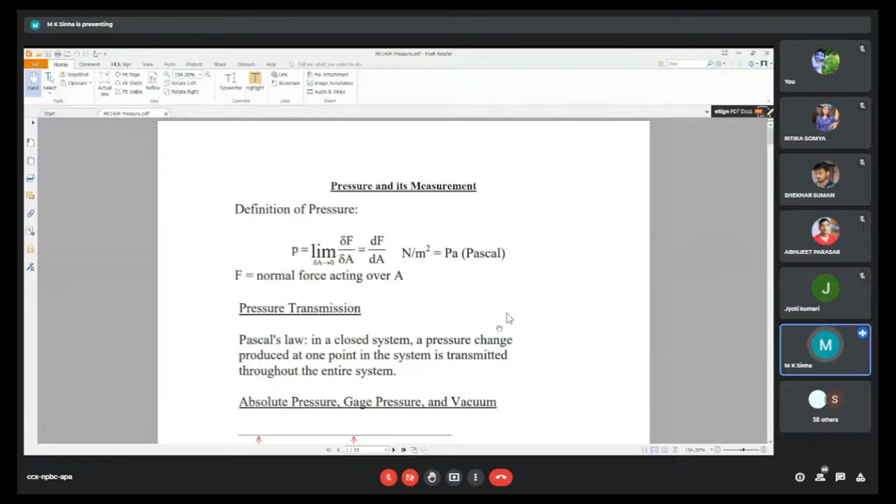It always acts inwards, as a normal force — this is called pressure transmission.

So Pascal's law applies in a closed system. There are types of systems you might have read about in thermodynamics — one is the closed system, another is the open system. Here we are discussing the closed system.

A pressure change produced at one point in the system is transmitted throughout the entire system, whatever the system — circular, cylindrical, spherical, or rectangular.

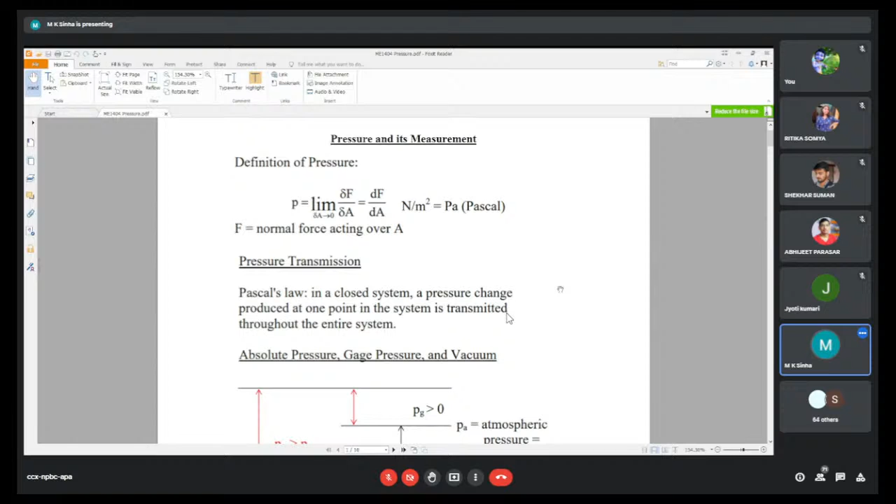It doesn't matter; the pressure change will transmit throughout the entire system we have taken or assumed. Then sometimes we talk about pressures as vacuum or higher pressure.

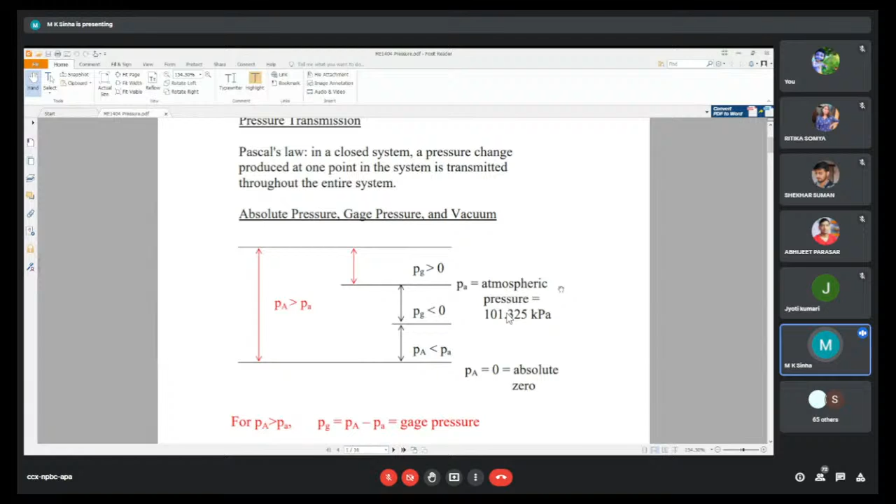So when we talk about absolute atmospheric pressure, you might know it is exactly 101.325 kilopascal.

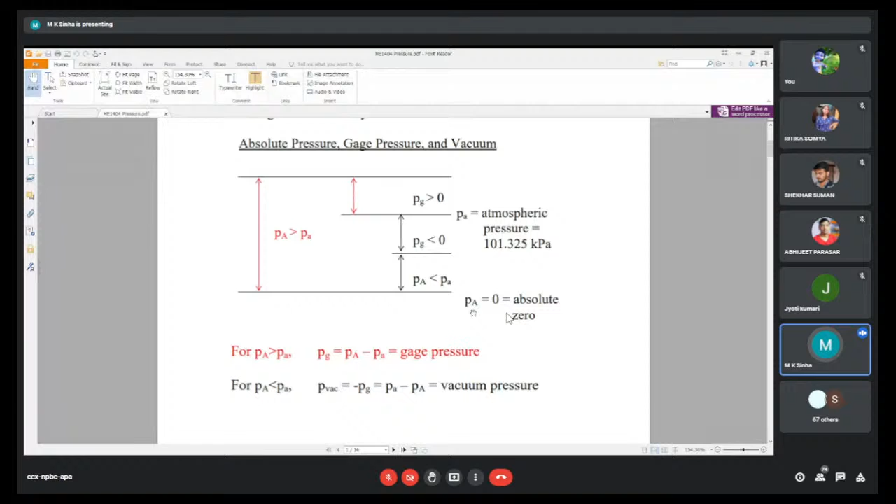We consider that when pressure at any point is greater than atmospheric pressure, the gauge pressure difference is positive. If it is less, then we are talking about vacuum pressure.

Let us generalize the pressure considering a wedge shape. In this generalized case we have chosen a wedge shape so that we can apply it to any shape.

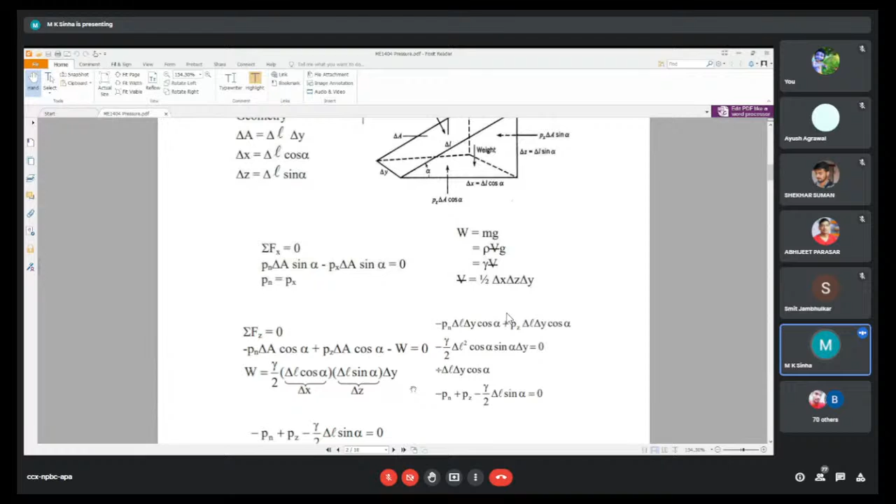Then the next component, fz, the vertical direction: minus Pn del l del y cos alpha plus Pz del l del y cos alpha equals this, where W acts downward and Pn acts downward. That's why minus Pz acts upward, and this will give relations that come out finally: Pn equals Px equals Py and Pz.

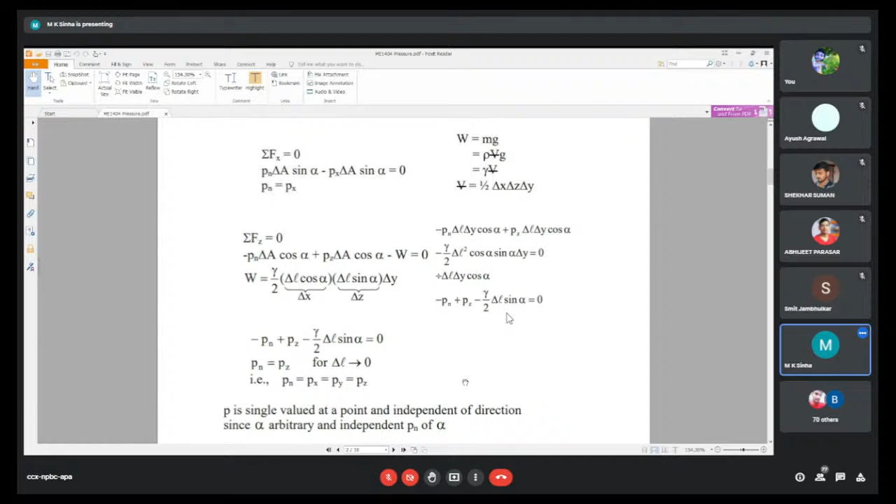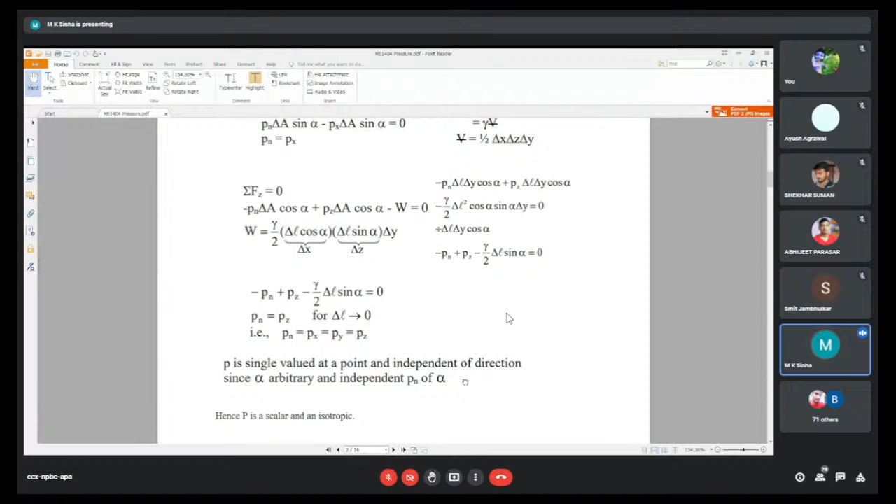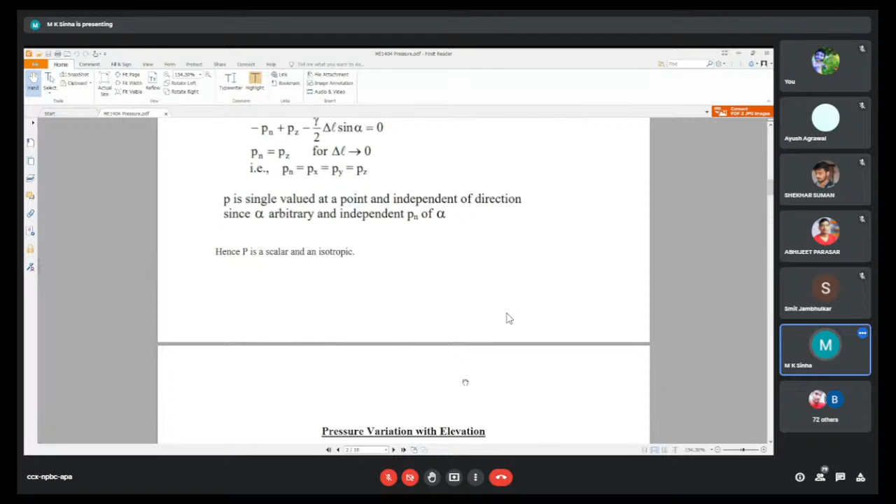So this is the basic differential equation for pressure variation with elevation. Here we consider a fluid element of length dx, dy and dz, shown along the x, y and z axes, with forces acting on it shown by arrow marks.

Remember, the bottom surface is our starting point for the z-axis, and the top section is at height dz. The lower pressure acts on the lower face, whose area is dx dy, with pressure p, and the pressure force on the bottom surface is p times the area dx dy.

On the top, the pressure also acts toward the fluid element, meaning the lower force acts upward while the upper force acts downward. Due to the element length dz, the upper pressure changes, and this is written using the Taylor series: p plus del p del z into dz, into area.

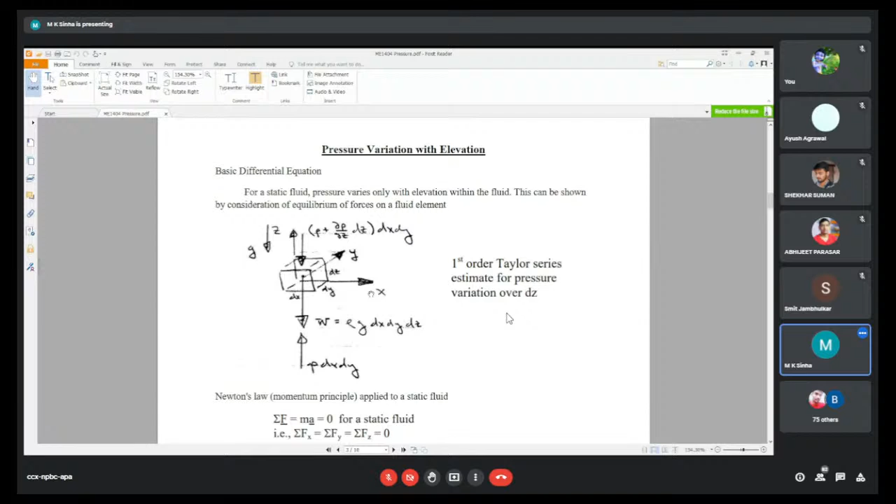This acts downward on the fluid element, and gravity also acts on this fluid element downward. So W is rho into g, meaning mg, and mg becomes rho into dx dy dz into g. All these are shown on our free body diagram.

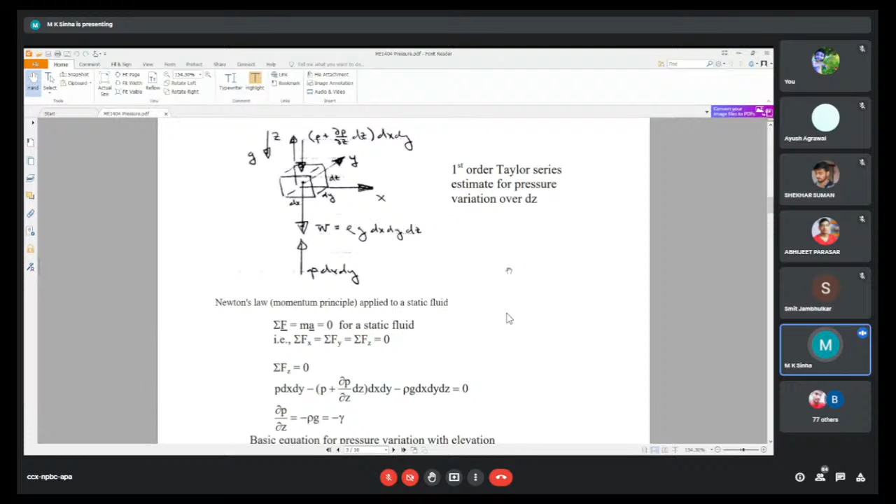This is written for hydrostatic situations, analyzing a stationary fluid element with no movement of the system. So, summation of forces equals mass into acceleration by Newton's second law. For a static case, summation of forces along x-axis, y-axis and z-axis equals 0, because in all directions it is static with no movement.

Here the z direction is upward, so p into dx dy acts from the bottom, and from the top minus p plus del p del z into dz. Remember this term is written from the Taylor series due to the change in height dz, which is why it's divided and multiplied by the area.

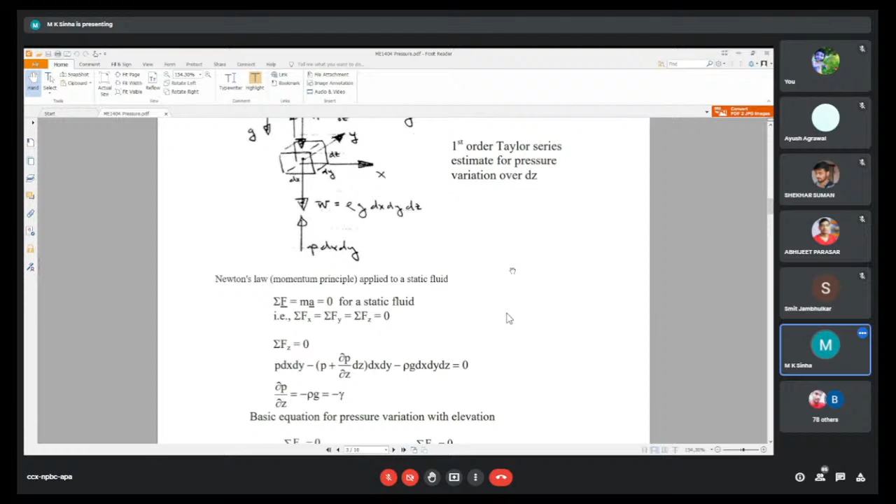We take upward forces as fz equal to 0. Downward is gravity, so minus rho g dx dy dz equals 0, or we can say del p del z equals minus rho g, or in terms of specific weight, minus gamma del p del z.

If z is the upward vertical axis, and if instead y is used, then it becomes del p del y equals minus rho g or minus gamma. Some books use y, some use z, but it is always the vertical direction. So del p del z equals minus rho g.

So here, z is the vertical direction or height. This is the elevation.

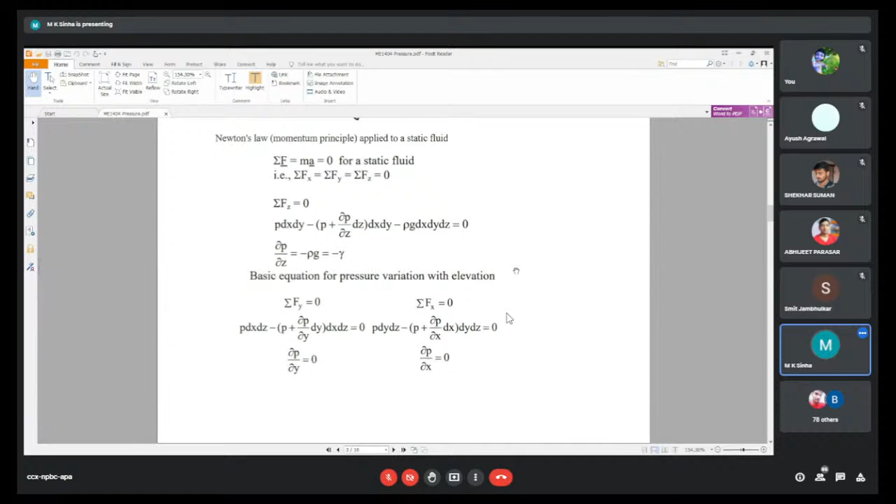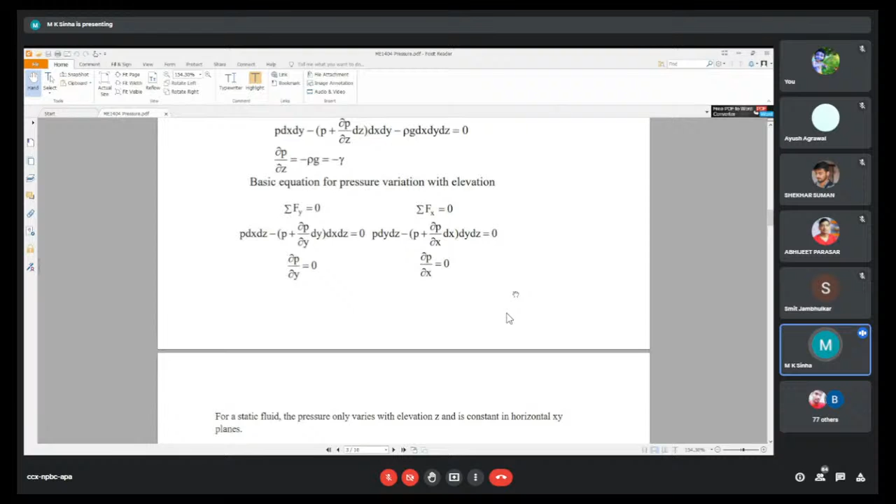This is the relation between pressure and elevation, the basic equation for pressure variation with elevation. Considering del y, del, the summation of force in y direction and x direction comes to nothing, so all these gradients come out as zero. Finally, for elevation or vertical direction only, the relation del P by del Z equals minus rho g holds.

This pressure gradient is developed due to gravity and depends on the density of the fluid. High density gives a high gradient, low density gives a low gradient.

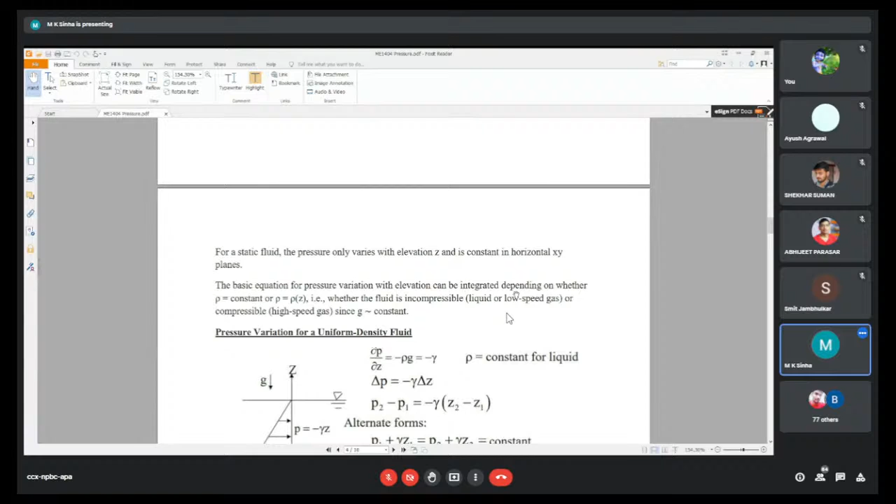So for a static fluid, the pressure only varies with elevation Z, meaning vertical height, and is constant in the horizontal xy plane. So the basic equation for pressure variation with elevation can be integrated, and rho, let us suppose, is constant. Whether the fluid is incompressible or compressible, then g is also constant. That gives us the pressure variation for uniform density.

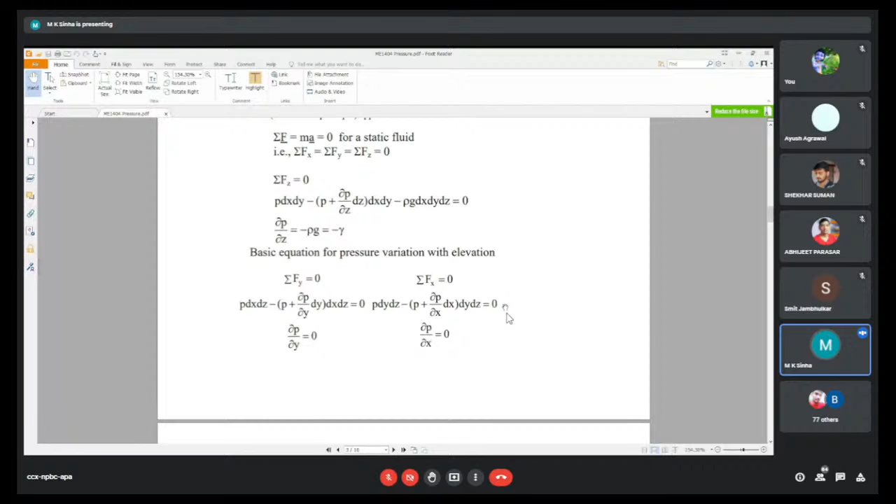When we are interested to find the pressure, we can integrate P equal to minus gamma, or minus rho g, into dz. Height variation or height may be given, so then we can find out the pressure at any height, any depth.

So let us see, that is the pressure variation throughout the uniform density of the fluid. Here the distribution of pressure is shown as pressure is a function of Z. Pressure is a function of the elevation, pressure is a function of the height.

So obviously, the distribution given at the surface is acting less, and at the bottom it acts more, due to the fluid height. As we go deeper inside, pressure acts more and more because more layers of fluid are available.

So del P by del Z equals minus gamma, or del P equals minus gamma del Z. Then the pressure difference at the final point to the initial point is equal to minus rho g times final height minus initial, or you take plus, then it becomes reverse, initial to final.

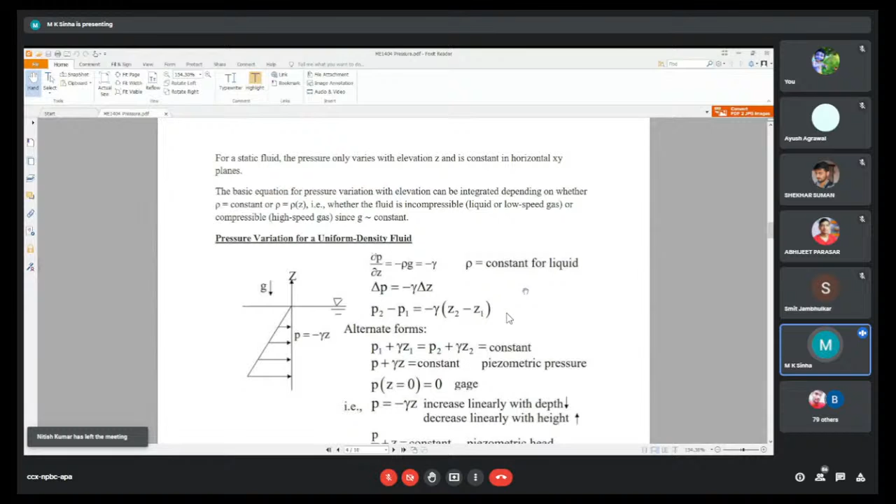But always remember, del P by del Z, del P by del Z equals minus rho g. Or you may apply P1 plus gamma Z1 equals P2 plus gamma Z2, which is constant. Or this P plus rho g Z, rho g H, if gamma Z is the actual height, yes, this is constant.

Pressure plus rho g H, pressure is nothing, rho g H, always the summation of both, that is the actual pressure plus piezometric height or the column height. That is P plus gamma Z, called the piezometric pressure. Always this is the summation of both.

P plus gamma Z, means Z is the height of the fluid plus how much pressure is acting, that will give the piezometric pressure.

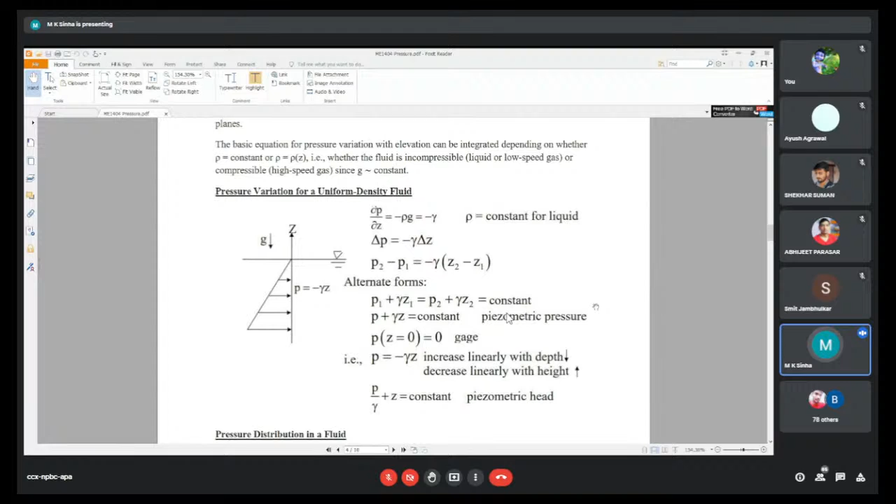When you write it in head form, P is divided by rho g, then it comes in the head form. It is also sometimes called piezometric head. Here, P by gamma plus Z is constant, this is called piezometric head. So when we use a barometer or manometer, we generally use piezometric head.

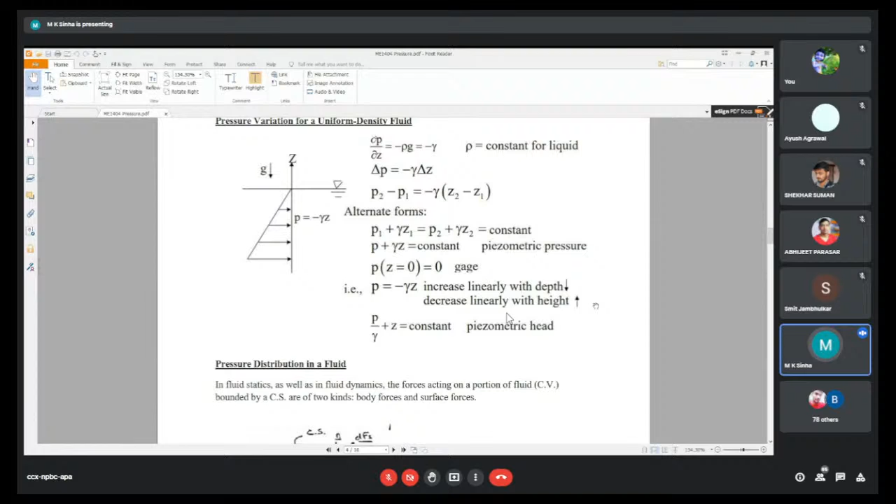But in pressure, we can also transform. So pressure may be written in absolute pressure or in head form, meter of water, meter of mercury, like that, or Pascal. So these are the relations.

Next, that is the piezometric height. Then, coming to the pressure distribution in a fluid, an arbitrary fluid is chosen here, and this portion of the control volume fluid element is taken. The control volume is formed by control surfaces, such as a square, rectangle, or cubic or cuboid shape.

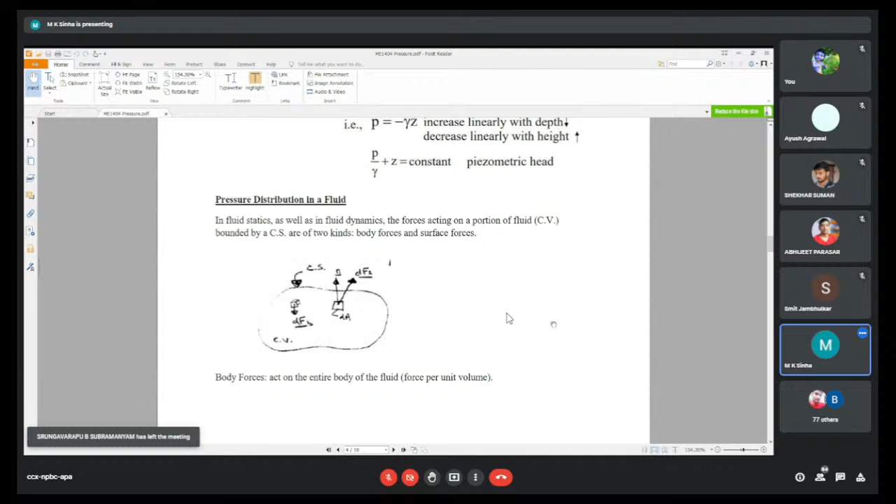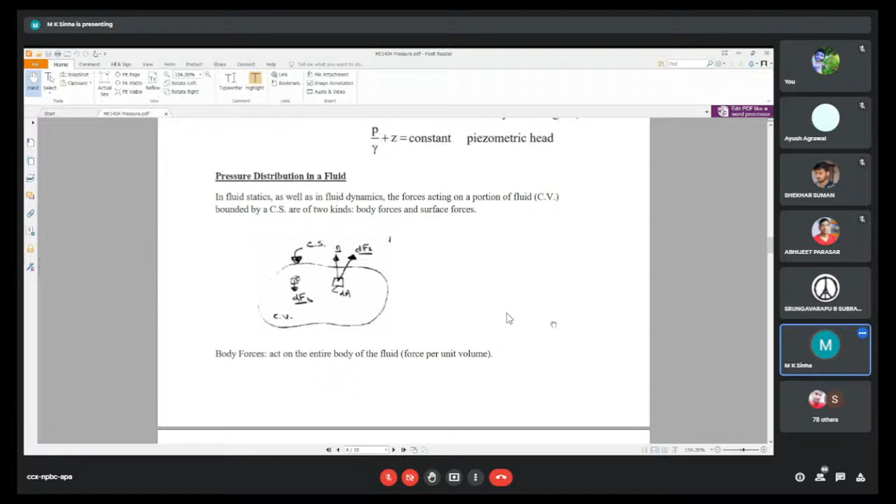Then each surface is called a control surface, and the whole system is called control volume. So the forces act on a small fluid element of area, with a unit vector outward normal, that is n, and any arbitrary force is acting, but n is the unit vector outward.

So the body force acts on the entire body of the fluid, and surface force acts at the control surface, due to the surrounding medium, as force per unit area or stress. Body force acting on the entire body means M into G, that is force per unit volume. We transfer mass into density into volume, then density per unit volume gives rho into G, that is the body force for any system.

But surface forces are different, tangential, normal, all these. Surface forces act at the control surface and are due to the surrounding medium, or force per unit area, that is the stress. Force per unit area is also pressure.

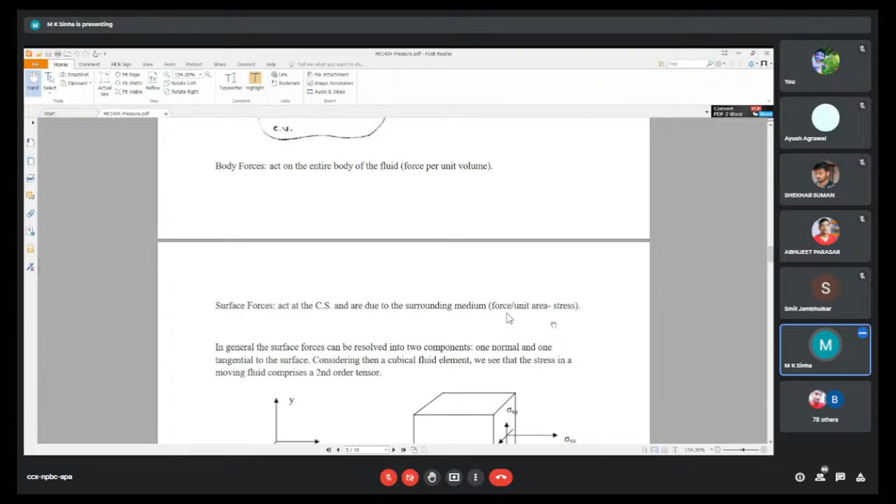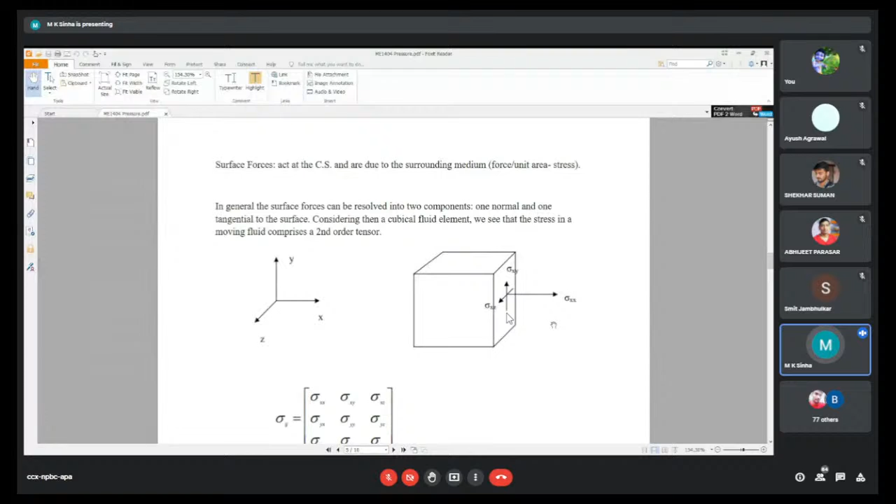So normal force acting is both pressure and stress, and shear stress acting on a plane is only a shear force. Generally here, a fluid element of dx, dy, dz is shown as its length, with x, y, z coordinate system for this cubical fluid element.

So sigma xx, sigma xy, sigma xz. Stresses acting along the axis x, and normal to the x-axis, that becomes sigma xx. Normal to the y, sigma xy. Normal to the z, sigma xz.

The stress acts along the x-axis as the first subscript, then acts perpendicular to the x-axis as the second subscript - perpendicular to y gives sigma xy, perpendicular to z gives sigma xz, acting along x. That creates the stresses. So when we write sigma as a matrix, it is sigma xx, sigma xy, sigma xz.

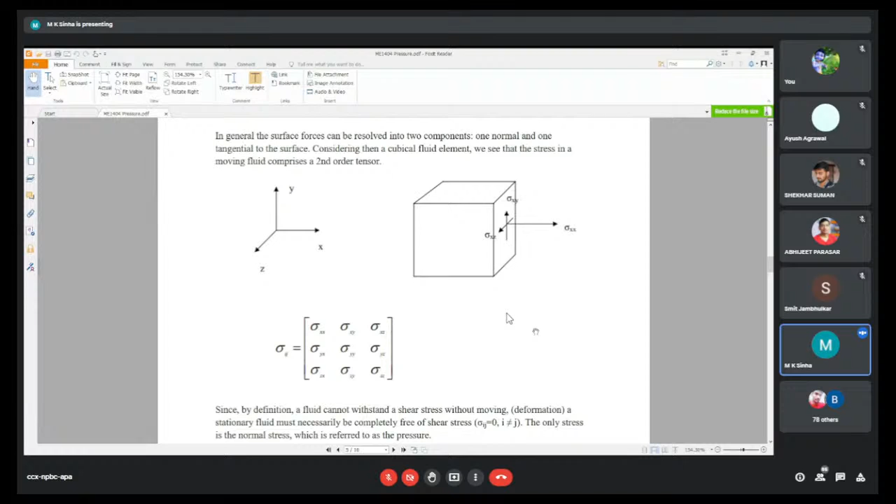So fluid cannot withstand shear stress. The fluid cannot withstand a shear stress without moving or deforming. So a stationary fluid must necessarily be completely free of shear stress. Please try to understand - the fluid cannot withstand shear stress without moving. So a stationary fluid must necessarily be completely free of shear stresses sigma ij or sigma xy, sigma xz.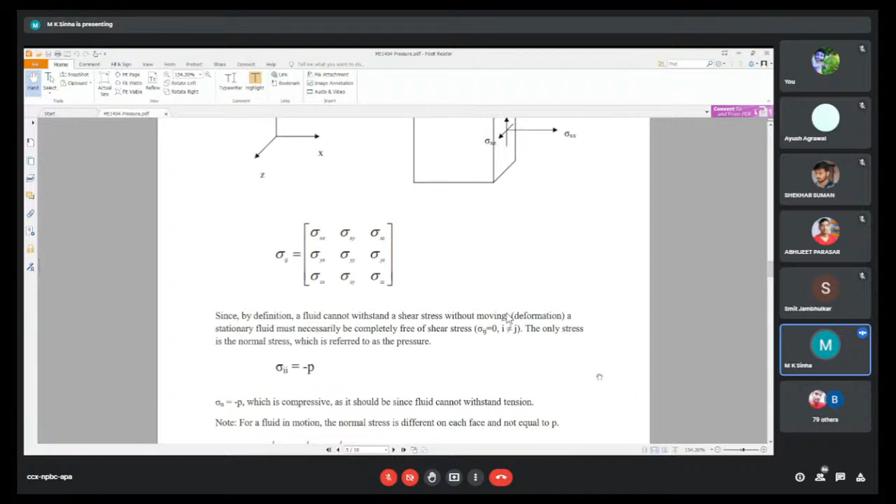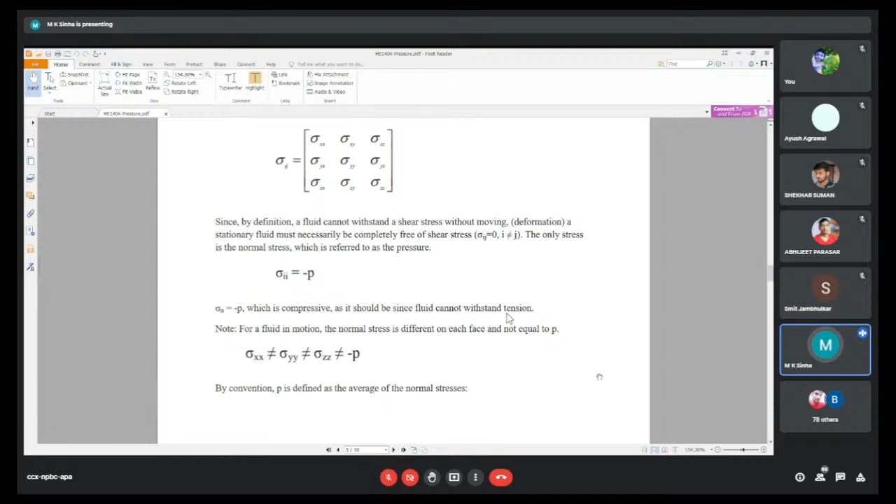So fluid cannot withstand tension. Note that for fluid in motion, the normal stress is different on each face and not equal to P. When it is in motion - here we are talking about the stationary case, that's why this is the analysis of hydrostatic pressure. When we go to the kinematics chapter, we will again discuss these things - sigma, p, tau - all these details we have to study in the Navier-Stokes equations.

There are three conservation equations in fluid mechanics we have to study. The first two are very important. The first one is the continuity equation. In one dimension it is very easy, but the continuity equation in three dimensions is important. We are interested in the continuity equations in three dimensions, and then by applying some assumptions or for special rules we can also write the continuity equations for one dimension.

Similarly, we have to study the momentum equations for the fluid element. I will teach you the higher Navier-Stokes equation, and there I can show you how sigma xx, p, tau xy and tau yx are acting, and what is the effect with the acceleration.

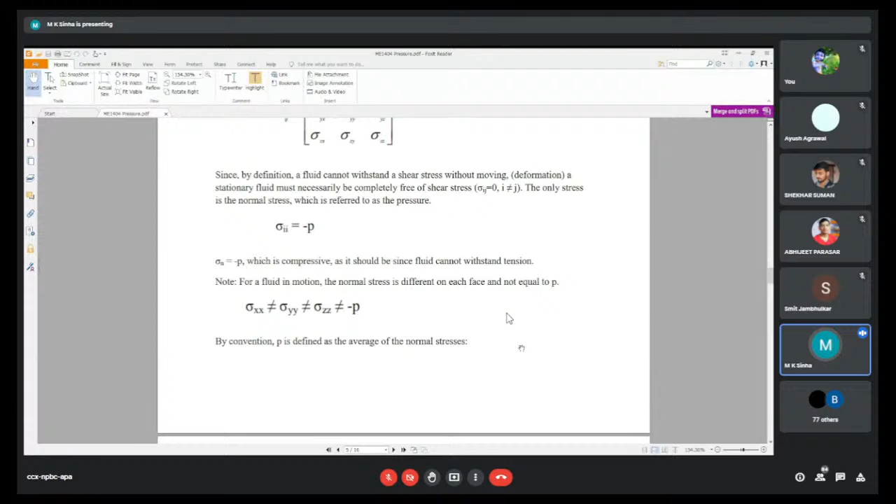So here, in hydrostatics, the fluid is stationary. Since it is stationary, only the normal stresses are acting, and pressure is acting both inward and outward.

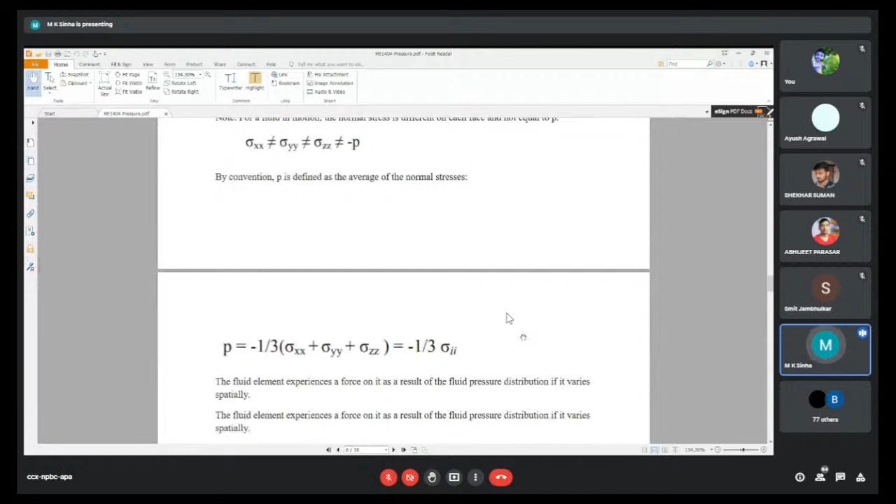So when we convert for the normal stresses, that will become minus. This is for the hydrostatic relation. A fluid element experiences a force as a result of the fluid pressure distribution if it varies spatially, along x-axis, y-axis, z-axis. If it is two-dimensional, then we take only two faces.

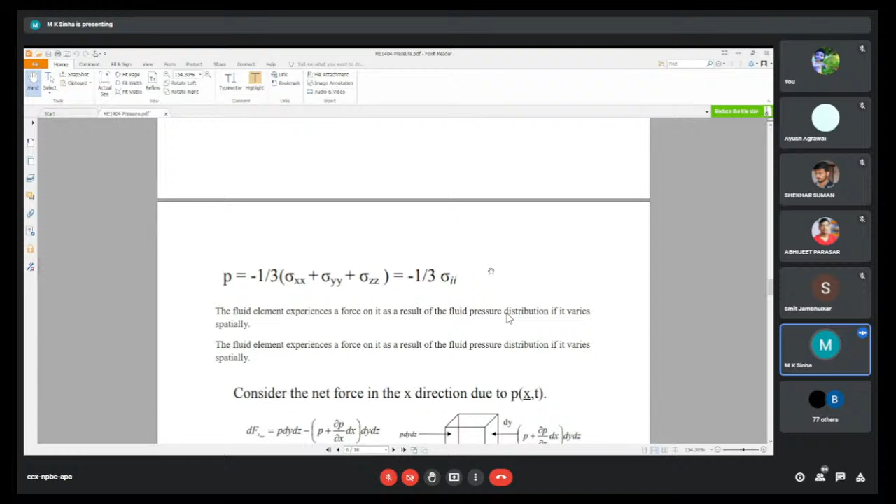So consider the net force in the x direction due to the pressure. Here the fluid element is shown, and first we consider the forces acting on the fluid element, left and right. That's why the subscript is marked x. So left side, right side, both are written - left side acting P acting along the x-axis. The element is marked by the length dx, dy.

Here the y-axis is upward, z is the incline. So here we have mutually perpendicular x, y, z, with lengths dx, dz, dy. Here the vertical direction is y.

So left side - you should have some query why we always take left side, because left side is positive and our axis moves from left to right, and right to left is negative, reverse flow. This is a general tradition, some trend. It is not necessary, but for the axis we generally take right side as plus, upward as plus. This is the general concept, but it is not always compulsory. Maybe sometimes it is mentioned you should take downward as positive for the axis, no problem. But here we have chosen a normal case.

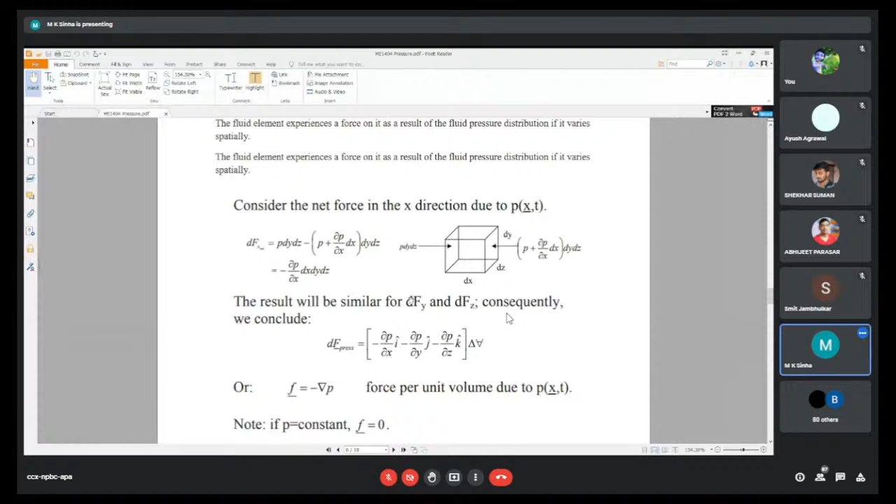So this is some idea about the pressures - all the different situations we have discussed of the hydrostatic pressure. Always remember, this is not the kinematic situation, we are not studying the motion of the fluid element, we have to study it.

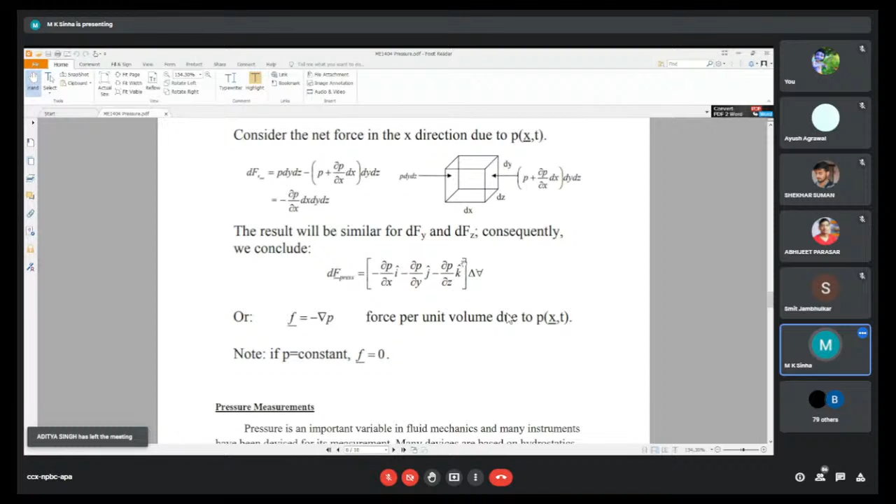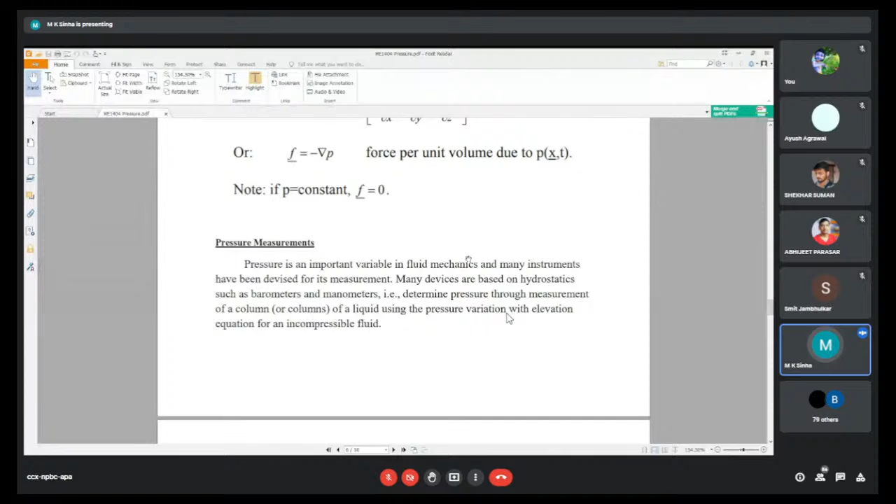So all these situations I try to show you in terms of the stationary pressure in a container of fluid, then its measurements - that is the fluid mechanics instrument. There are so many instruments; some of them you might have read about, just I will show you and refresh you.

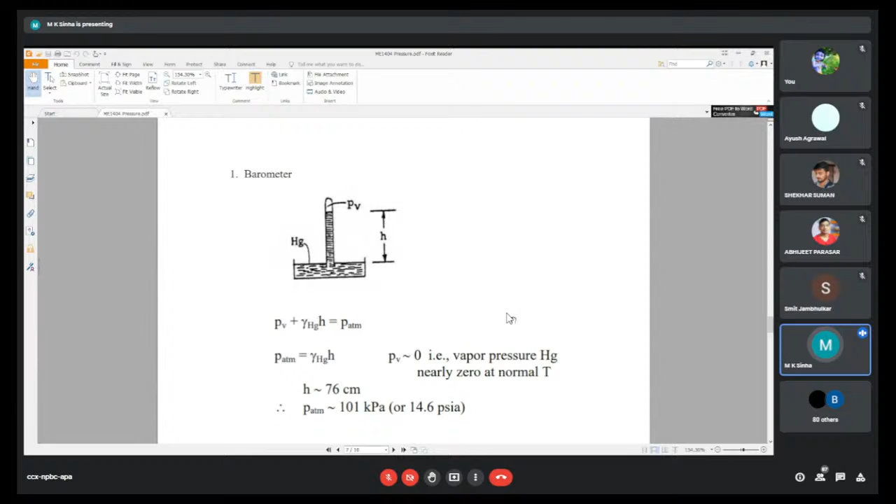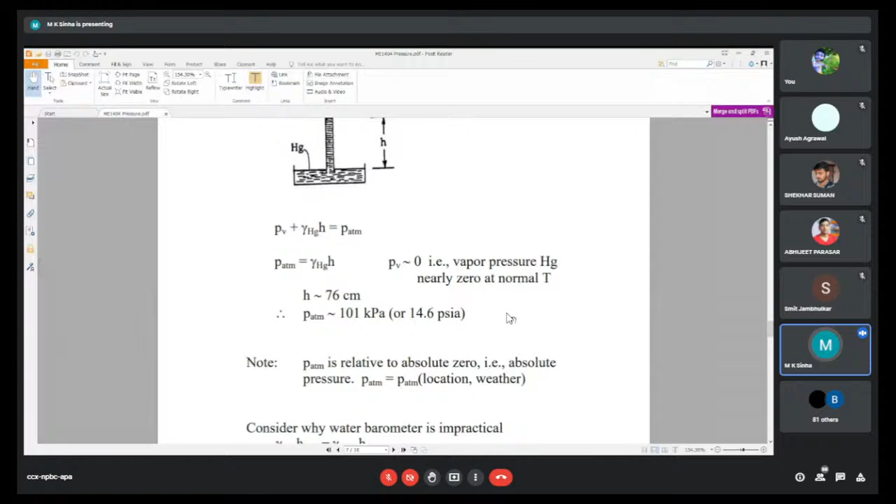Am I right? So here, that is some barometer. The pressure of this tube or column, plus gamma of the mercury into H, that is P atmospheric. And P atmospheric is rho GH, gamma equal to rho G, rho GH. When vapor pressure of mercury is nearly zero, or the height of the column in the mercury situation is only 76 centimeters, so P atmospheric will become 101, applying rho into G, 13.6 of the mercury, that is the density, and 101 kilo Pascal approximately.

So P atmospheric is relative to absolute zero, absolute pressure, P atmosphere location, and considering why water barometer is impractical - if you should use water, then it requires 1033 centimeters long tube. In case of mercury, we are using only 76 for the same situation.

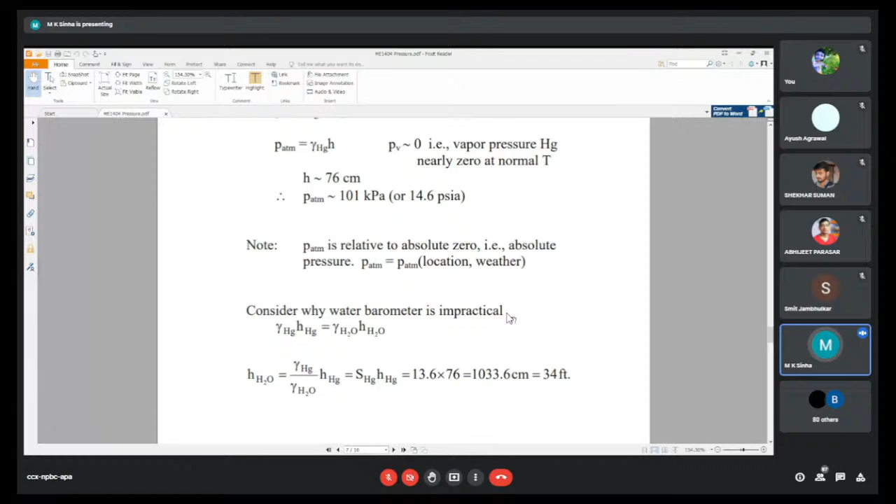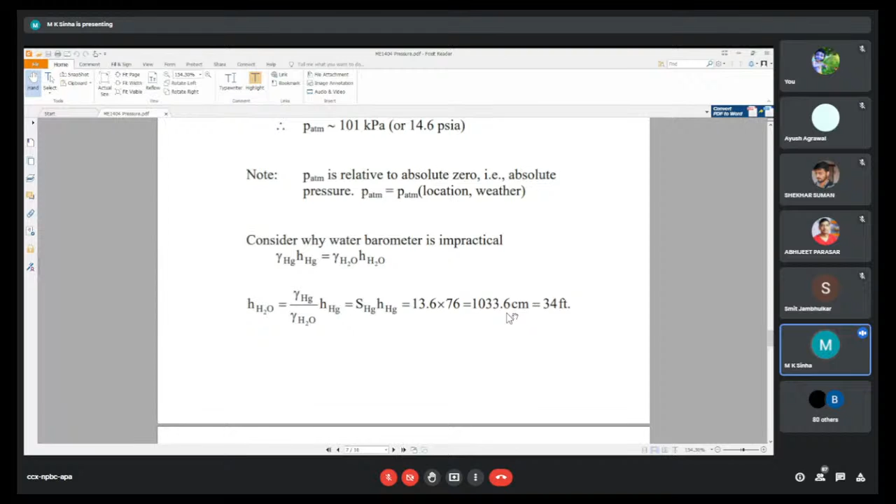That's why we have the manometer. Manometer may be differential, may be inverted. The measuring fluid - we are measuring the pressure difference of different fluids, or the measuring fluid density and the fluid whose pressure is different. So we always take a high density fluid as compared to the measuring fluid.

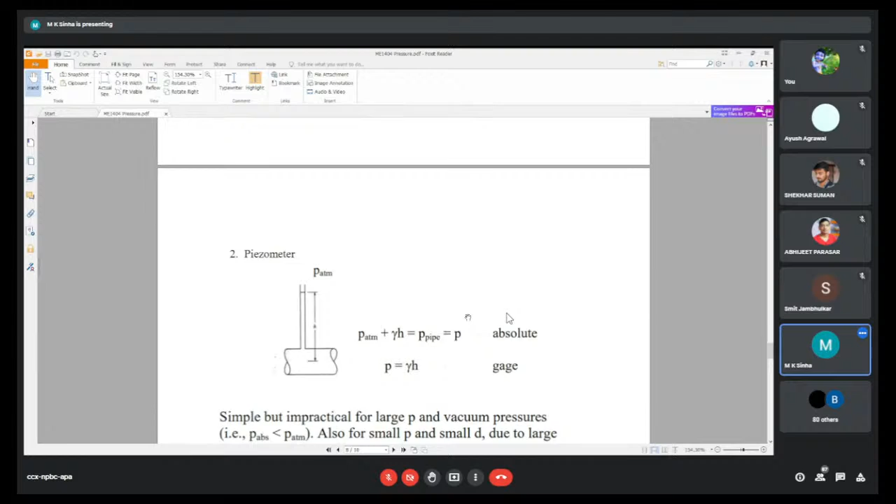Here, piezometer - just I have shown you piezometric head, piezometric pressure. This is a pipe and a tube is inserted, hardly 1 mm diameter or less, then it will rise to H. And this is the manometric, that is the piezometric head, and this could be corrected using this.

Then manometer, this is the manometer. One question is generally asked from the manometer. So manometers are devices that use liquid columns for measuring differences in pressures.

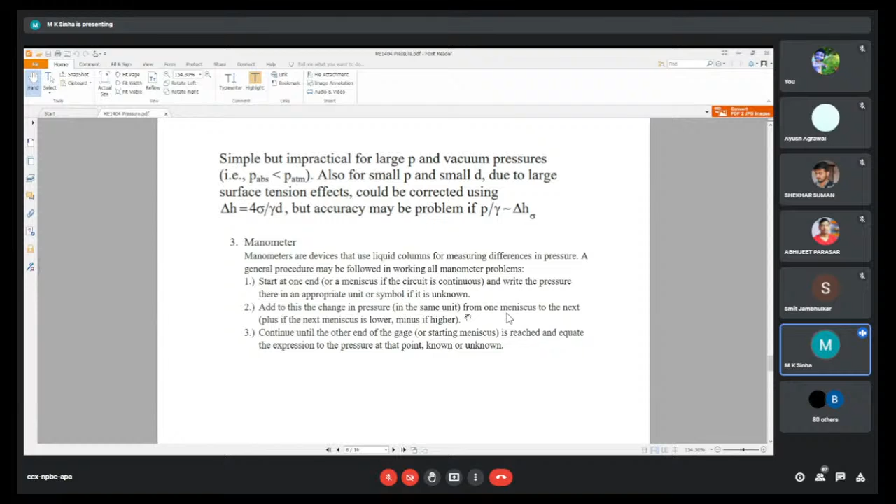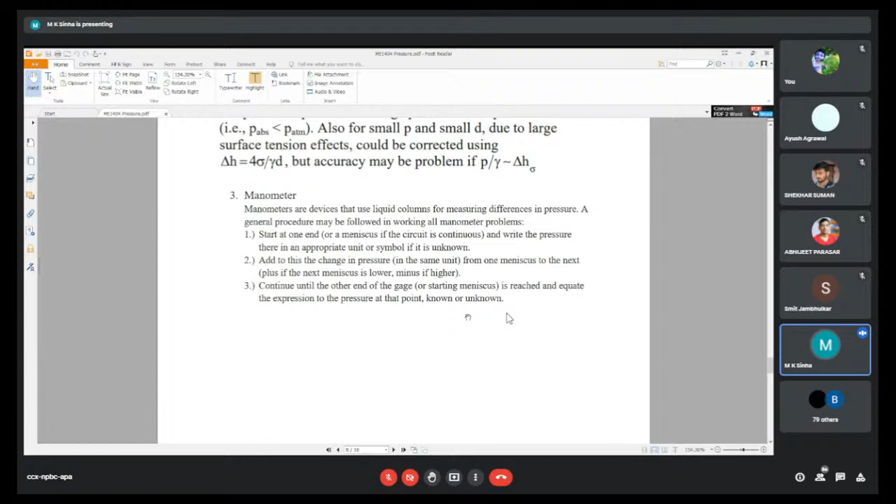General procedure may be to start at one end of the meniscus if the circuit is continuous, and write the pressure in appropriate unit, meaning in the same unit, add to this the change in pressure from the meniscus of the column, and continue when the gauge is related to the pressure.

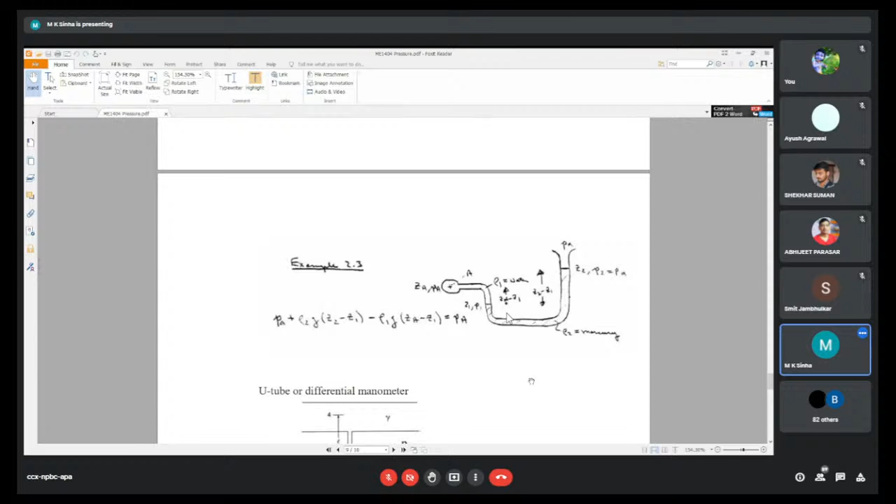Another case: the manometer is connected to measure the pressure of a flow of fluid through a pipe. First, for the container we wanted to find pressure with the help of a manometer. Second, through flow through the pipe we have to measure that pressure. So the manometer is connected, and it is always considered as the distance from the center of the pipe.

Now here is the important part: the line at mark 3-2, this is the line at which pressure on both sides is constant. Always remember, draw a line which cuts both limbs or both sides of the tube of the manometer, and both ends have the same pressure. So pressure at 3 equals pressure at 2.

And what is the pressure at 3? What is the region? You have to write it. So P1 means the pressure acting at 1 plus height of the column del H, so P atmospheric plus gamma m into del H — this is acting on the right side. The left side is the pressure at 4, which we have to measure, plus height of the column.

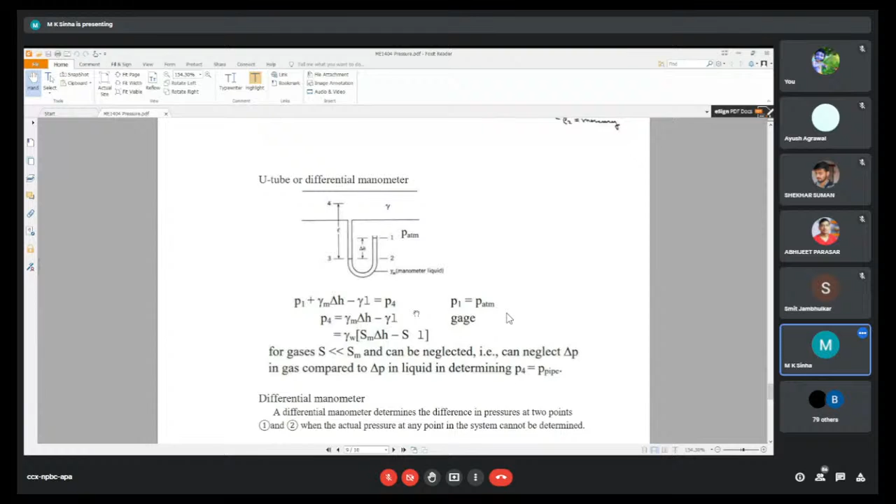Then the differential manometer. A differential manometer determines the difference in pressure at two points when the actual pressure at any point in the system cannot be determined.

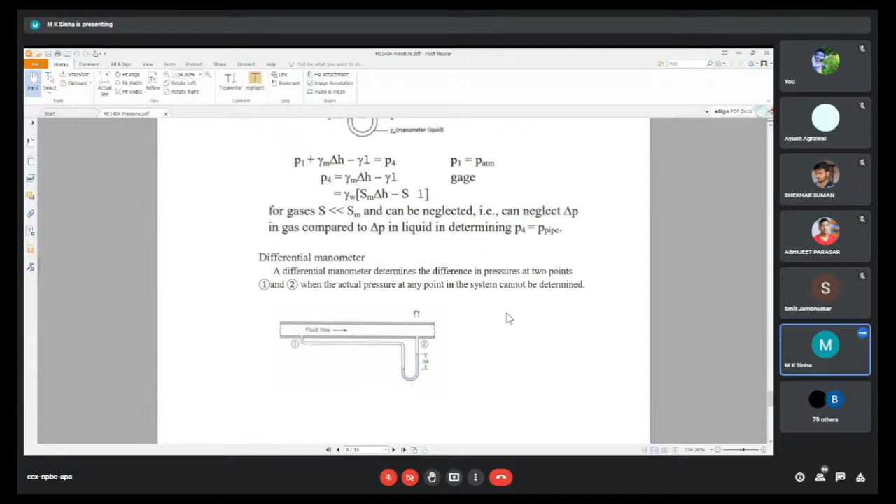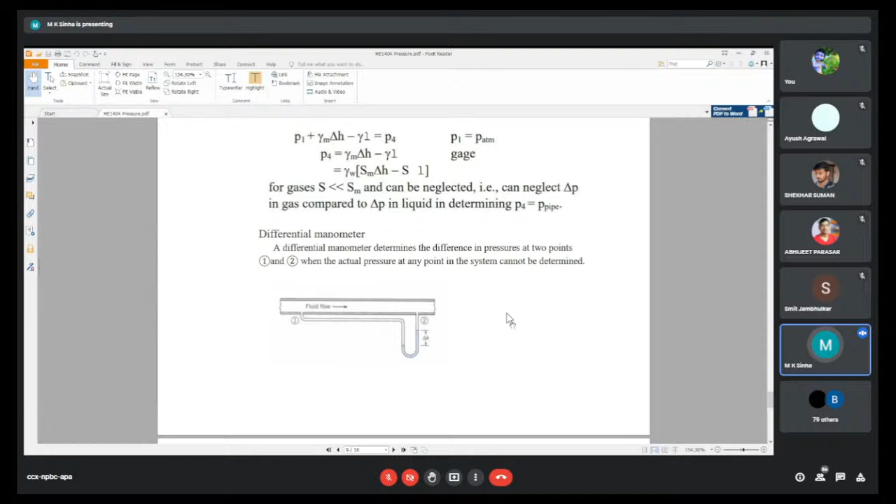Here we have shown that the manometer measures the pressure of a container passing through the pipe, and the pressure difference between the two points in a pipe. If there is some source or sink in between them, or a change in the diameter of the pipe, then a pressure difference will be created, otherwise it remains the same. So between point 1 and 2, some source, sink, or obstacle may be provided which causes this change. Here is one example for the inclined plane marked here.

This shows the difference in piezometric head on both sides. You just have to take any point, that is point A on the right side, write down the pressure acting at point A, do the same on the line at the right, and rearrange, and this will come out.

It's correct. So for the manometer, when we use more than one manometer, you should use the inverted, that is the reverse U tube. But the principles are the same. We can connect more than one manometer in series also, and apply the formula. Is it correct? You may also use Bourdon tube type gauge manometers, digital ones.

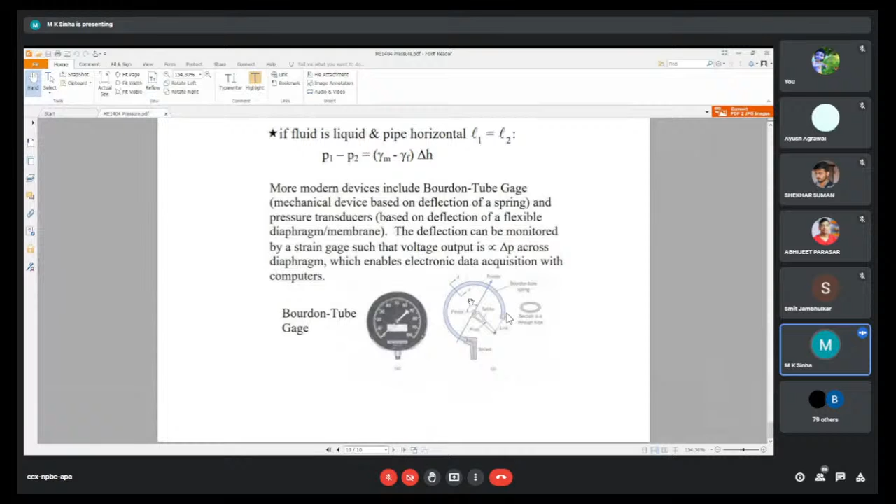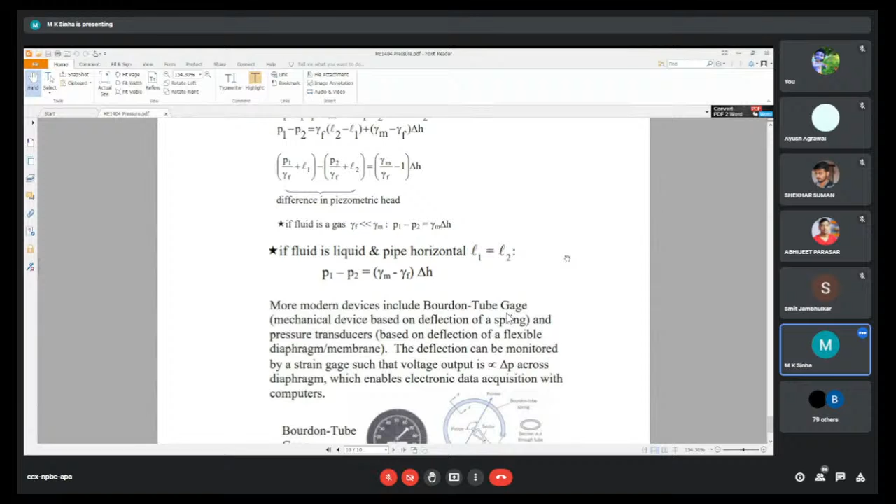These you might use in the lab, but the manometer principle generally kept in our lab, also in the heat transfer lab and fluid mechanics lab, manometers are available, that is the U tube type. In turbines also, manometers are connected.

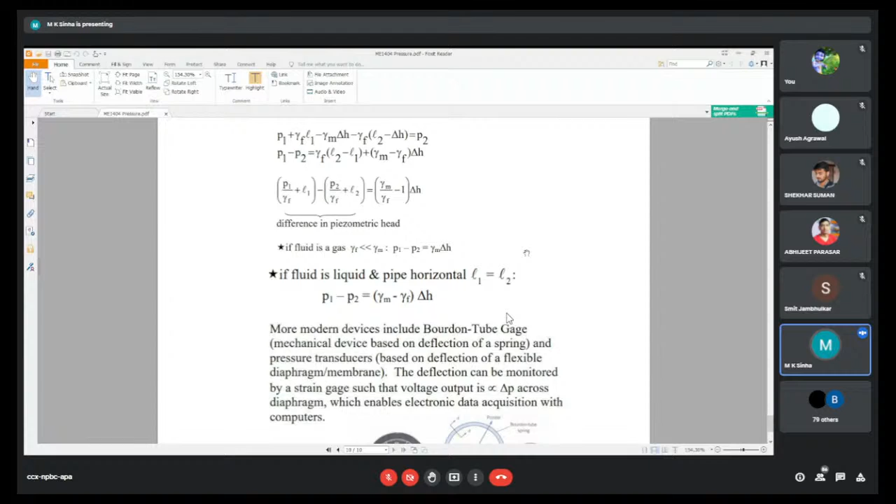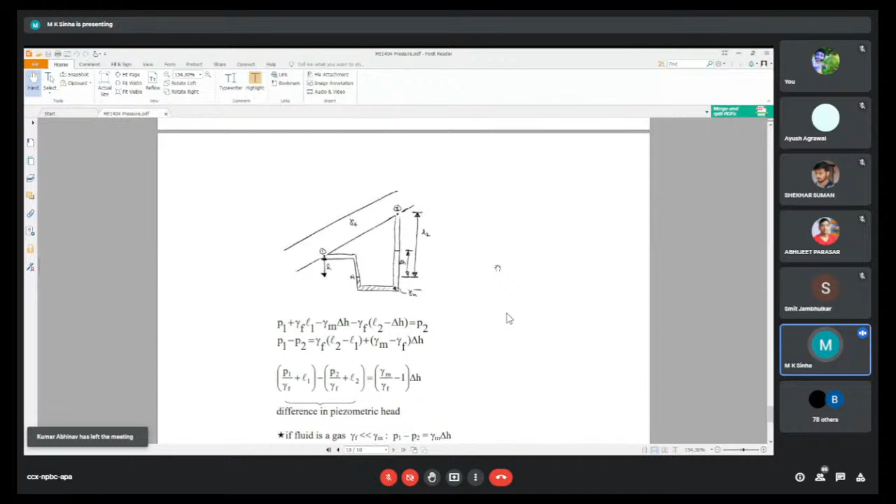Am I right? So we will take some examples of the manometer and try to show you how we can calculate the pressure in different situations by applying these methods. So this is all about pressure. I tried to give something. If you have any query, then ask me.